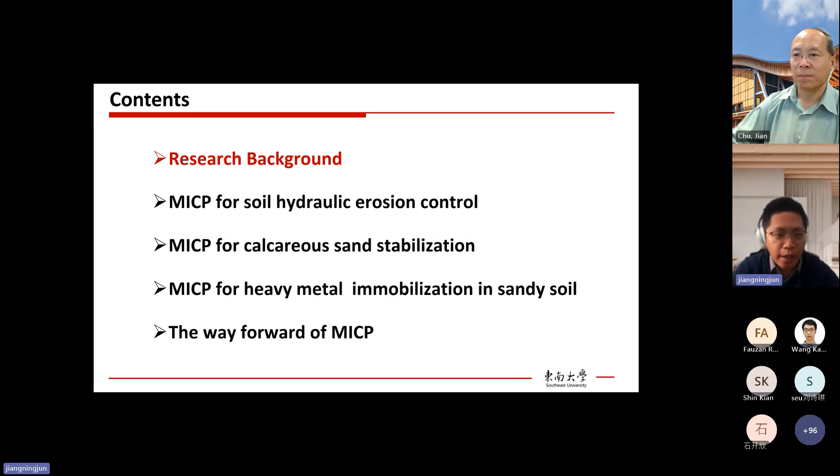For today's presentation, firstly I would like to briefly introduce the background of biosoil research. Then I will spend most of the time introducing three studies done by our research team in recent years: one for soil hydraulic erosion control, second for calcareous sand stabilization, and third for heavy metal immobilization in sandy soil. Finally, I will take a few minutes to talk about the future for MICP.

As we know, in classical soil mechanics, we normally regard soil as a three-phase substance consisting of solid, water, and air. All modern soil mechanics theories are based on this three-phase framework, meaning we only consider the inorganic matter in soil - we ignore all biological activities and substances in soil.

From the perspective of agriculture, environmental science, and engineering, this is not correct, because biological activity plays a very important role in soil. It can change soil chemical and biological properties and affect a lot of things. But in soil mechanics, we simply ignore it.

So in recent years, people gradually recognized the importance of biological things like plants and bacteria in soil that could affect the soil engineering properties. That leads to the establishment of bio-geotechnics, a very new branch of geotechnical research.

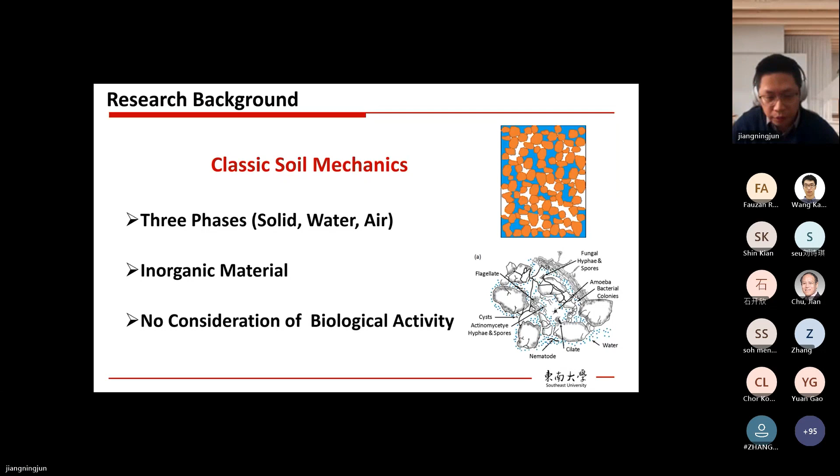Okay, so in bio-geotechnics, currently people are focusing on several processes like biomineralization, biogas, or biofilm. Then among these processes, biomineralization, or more specifically, microbial mineralization, is one of the most popular areas for research. So actually, microbial mineralization is a quite ubiquitous process in nature.

It can be driven by many processes, including oxidation reduction. For example, the reduction of sulfate is a quite common process, like photosynthesis, because plants can absorb CO2 from the air to produce carbonate, and this could lead to mineralization. And among these microbial mineralization processes, microbially induced carbonate precipitation, or MICP, is a key research area in geotechnical engineering. So here, when we talk about MICP, we normally refer to urealytic-based MICP.

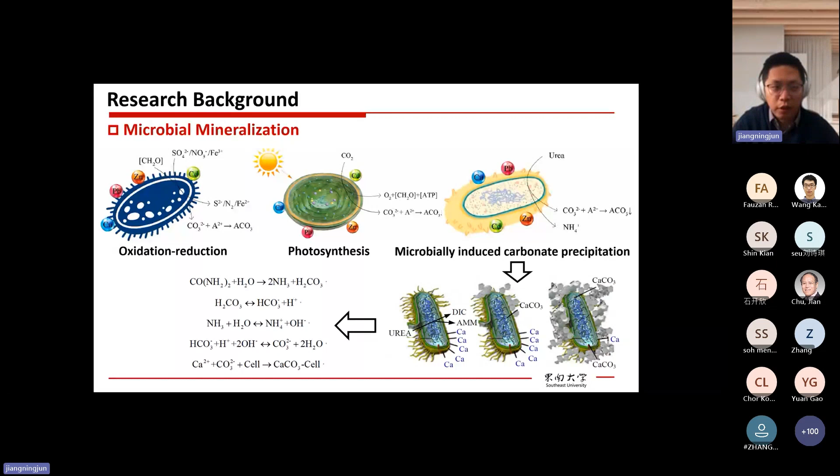Since I believe the audience today is quite familiar with MICP, I'll just briefly introduce the process. For urealytic MICP, firstly, some urease-producing bacteria, which could be standard bacteria or native bacteria, secrete urease. This is a special enzyme. This enzyme could hydrolyze urea to produce ammonium and carbonate. And meanwhile, the environment pH also increases, so it becomes alkaline.

Okay, so under this condition, if there are also calcium ions present in the system, then the calcium ions could react with carbonate ions to generate calcium carbonate. And this leads to crystallization and mineralization. So the formed crystals, if happening in sandy soil or granular materials, could cement the granular soil particles. So this could lead to the improvement in soil engineering behavior.

So previous research about MICP has revealed that the mechanisms of MICP for granular soil improvement are mainly these 3 points. First, the generated calcium carbonate crystals could provide bonding strength, so the cohesion could increase. Secondly, because we have extra crystals within the soil, the overall density of the soil is improved. Improved density normally means improved strength.

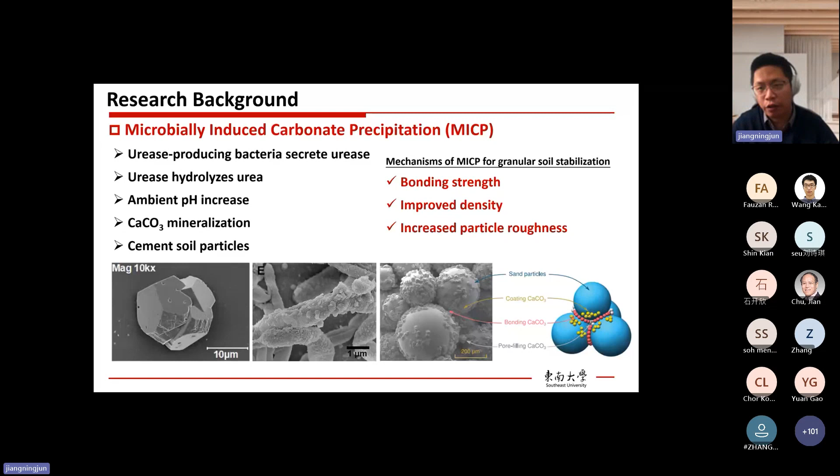Then next, I would like to talk about how we can potentially implement MICP in the field. From the perspective of environmental engineers, there are 2 ways to implement bio treatment. The first one is bio-augmentation. The second one is biostimulation. Bio-augmentation means that some standard known bacteria cultivated in the laboratory are directly injected in the form of solution into the ground, followed by cementation solution injection. And this could lead to the MICP reaction in the field.

Of course, this one is quite convenient because we simply need to prepare an existing bacterial solution and then do it. But the disadvantage is that the compatibility of the injected bacteria with the in situ soil may be a problem. They may diminish very quickly. So that's bio-augmentation. Then the second approach is biostimulation. Actually, there are also 2 ways to do biostimulation.

The first one is ex situ biostimulation. It means that the native soil is first taken back to the lab, and then extraction, isolation, and purification of native microbial species are performed so that we can get advantageous indigenous bacteria. This one could work very well in the native soil condition. Then we could perform enrichment and reinjection to get the bacterial solution back into the ground.

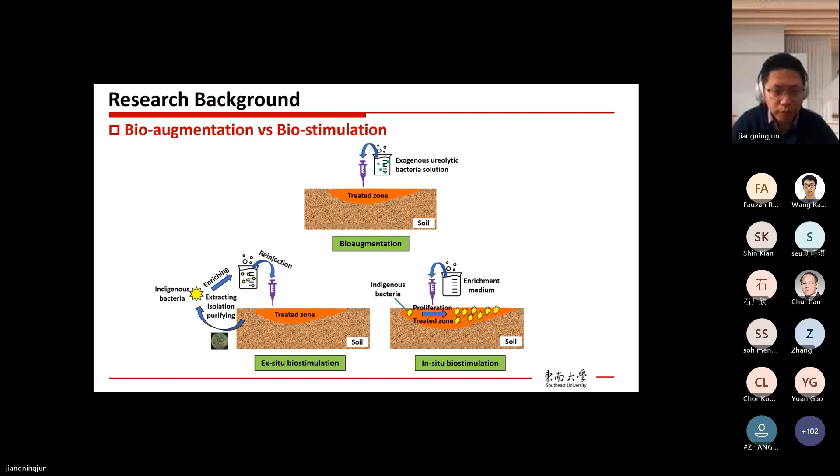And regarding previous MICP research at different scales, we can see a lot of reports and technical papers. From nano to micro scales, people have used SEM to get the microstructure features, atomic force microscopes to see the interactions between particles and bacterial cells, microfluidic chips to see how bacteria and cementation solution migrate within the porous medium, and XRD to see how crystals change with time and the ingredients. At the element scale, researchers are using various geotechnical testing methods.

For example, the triaxial shear test, unconfined compressive strength test, compression test, etc., to assess the mechanical behavior of MICP treated soil. And at pilot to field scale, we can also see a lot of reports. And this is an interesting part, so I want to introduce a little bit more.

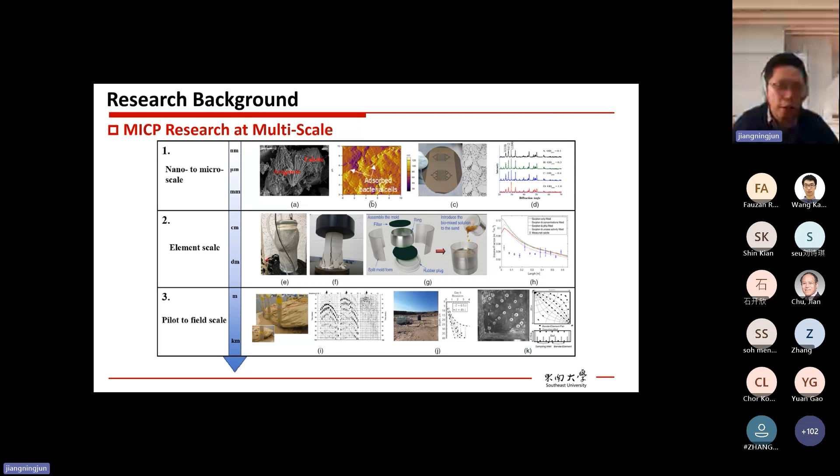So here, this slide shows some representative pilot to field scale applications of MICP in the last decade. For example, in 2013, Professor DeJong from UC Davis used MICP to do surface erosion control. Professor Chu in 2013 also used MICP to make a pond impermeable. Professor Liu from Chongqing University used MICP to treat calcareous sand in the South China Sea, and they got the solidified

sand foundations. Also in 2019, Professor van Paassen did the liquefaction control using the MICP method, and we can see the setup in the field. This year, Professor Kawasaki from Hokkaido University in Japan used the MICP method to improve the slope stability, and this graph shows the laboratory model test. And in 2021, Professor Kavazanjian from ASU treated the sandy soil with MICP, and we can see the formed column with quite high strength.

Professor Miao, also from Southeast University, considered the wind erosion in the desert area using MICP and achieved quite good results. Professor Montoya from North Carolina State University used MICP for coastal erosion control, and this is the large-scale model test. And also some other researchers use MICP for contaminant immobilization and control, and here is the setup for the monitoring. So we can see there are already many researchers trying to upscale MICP to the field.

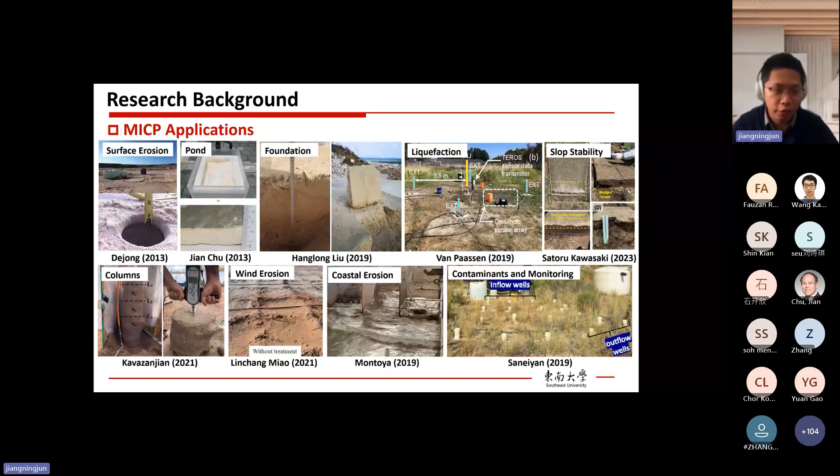So that's good. But to be honest, there are still some problems that, as bio-geotechnics community members, we have to address before it can be used in a real project. And here I listed 3 papers our team published in the last 4 years. They are mostly review papers talking about the future of MICP for soil improvement, a comprehensive review of the process, materials, calculation, and applications of biomediated soil improvement. And for the paper published in Biogeotechnics this year, we reviewed the MICP method in environmental geotechnics in particular. So if you are interested in these papers, you can simply search online and find them.

Okay, so second part, I would like to introduce our research on MICP for soil hydraulic erosion control. As we all know, the hydraulic erosion problem could lead to disastrous engineering problems like dam internal erosion, seepage piping, coastal erosion, rainfall erosion. They happen globally, almost everywhere, every year. So it's very important to find a way to address it. So here we propose the use of MICP to control hydraulic erosion.

So in order to do that, we have to bear in mind a few key points. The first one is that the hydraulic erosion vulnerability of soil fundamentally depends on soil properties, for instance, the particle size distribution, the fines content. So our target should be erosion vulnerable soil. It means that naturally the fine particles from the soil can be eroded, so that we need to do improvement.

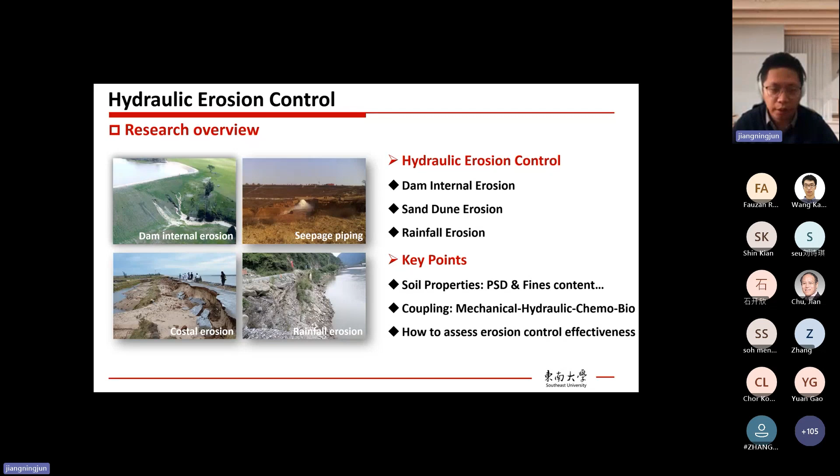Okay, firstly, this is an example we did for internal erosion control in gravel-sand mixtures. Because in gravel-sand mixtures, especially when they satisfy a certain particle size distribution, the sand particles can be very easily washed out from the gravel skeleton. So firstly, we look at this case. We designed a large one-dimensional column internal erosion testing apparatus, as you can see here. To accommodate the size of gravel particles, we made it with a diameter of 240 millimeters and height of 550 millimeters, so it's large enough to accommodate the gravel-sand mixtures.

Then we designed an MICP implementation unit, so the bacterial solution, cementation solution, and distilled water can be injected in sequence based on our need. In addition, we also installed a hydraulic pressure unit so we can achieve different hydraulic pressure levels. And this sample is controlled by a pneumatic cylinder so that we can achieve different vertical stress levels. Then in this test, we did both untreated soils as well as MICP treated soils under different hydraulic pressures. So this graph is quite obvious.

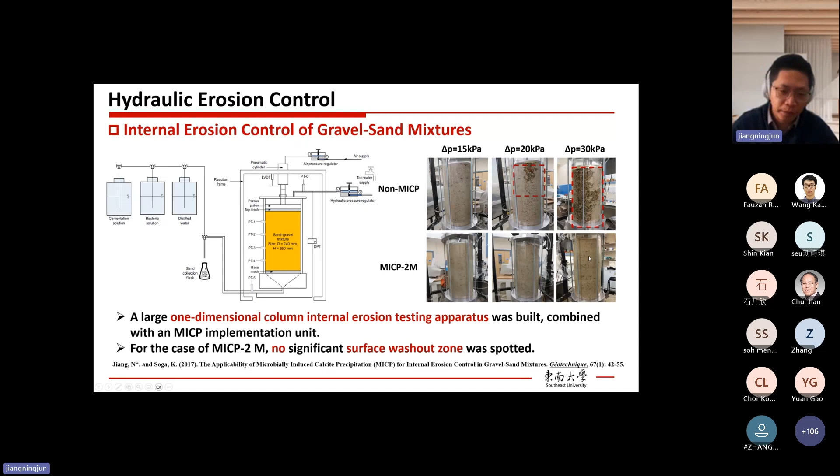Then we want to know what are the key factors that affect the erosion control effect of MICP for gravel sand mixtures. So firstly, we looked at the cementation solution concentration. And this is the erosion rate versus time graph. You can see that the black one is the untreated samples. The green one is the low cementation case. The pink one is the moderate cementation case. Then the red one is the heavy cementation case.

Obviously, if we only have a little bit of cementation, the erosion control effectiveness is not that good. In some cases, it could be even worse than the untreated case. But if we have a lot of MICP, so with more cementation solution concentration, then almost no erosion.

And in addition to the erosion rate, if we look at the erosion rate versus flow velocity relationship, we also find that with heavy cementation, the critical flow velocity is also larger than the moderate or slight cementation case. So it means that MICP treatment could improve the critical flow velocity. And the more cementation solution concentration we have, the higher critical flow velocity we have.

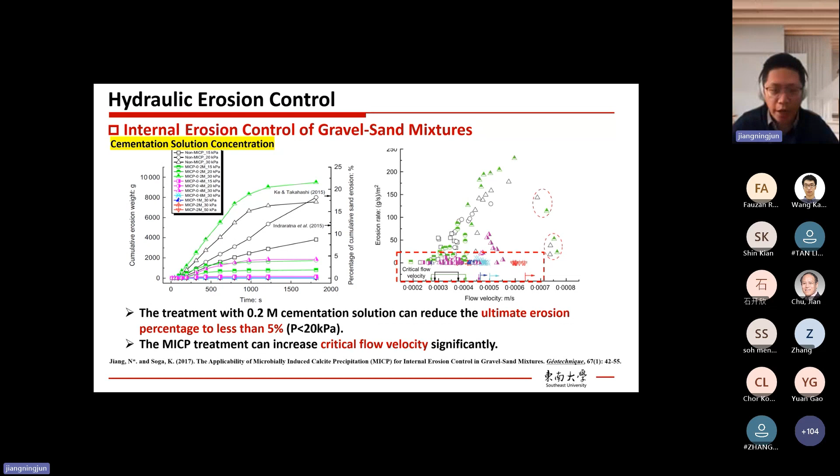In addition to the cementation solution concentration, the original soil composition is also quite a key factor. So here we investigate two cases. One is with 25% sand, the other is with 50% sand. For 25% sand, this is basically a gravel supported structure. It means the skeleton is mostly gravel and the sand particles are loosely distributed within pores. For the 50% sand content case, this is basically a sand supported structure. It means that the skeleton is formed by sand instead of gravel.

So for these two structures, after we did the erosion test, we find that MICP works very well for the gravel supported structures. It can effectively cement the sand particles so that they will not migrate through the pores. But for the sand supported structures, MICP is not always effective. In some cases, it could be worse, especially if we have a high level of vertical stress.

This is because we simply have too many sand particles. And if the cementation is not enough and we have high vertical stress, then the stress can push the uncemented sand out of the soil structure. So we see a lot of eroded mass. And if we see permeability in this case, the permeability also increases dramatically because of the loss of sand particles. So this result demonstrates the importance of original soil composition.

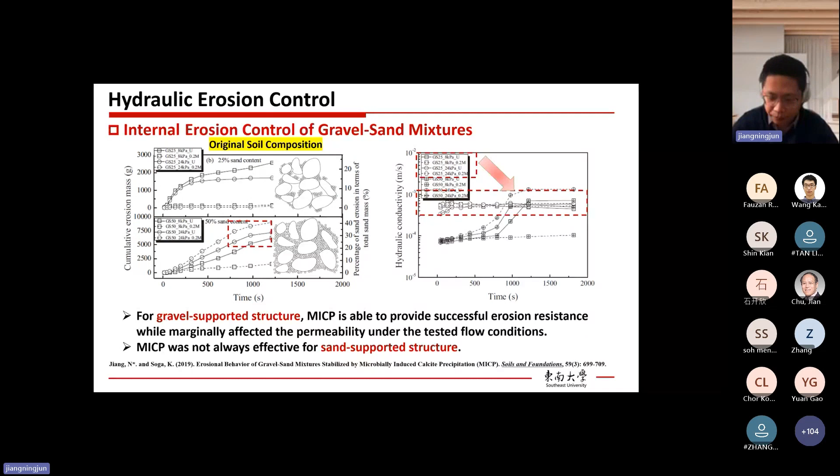So in addition to the gravel sand mixtures, we also investigated the internal erosion control of sand clay mixtures, because this also happens quite frequently in the field. Because sand and clay particles are smaller than the gravel particles, this time we made a smaller testing apparatus with 50 millimeter diameter and 100 millimeter in height.

So in this test, because we have to monitor clay, it's almost impossible to measure the eroded mass. So instead of using a balance, we use a turbidity meter to monitor the clay concentration from the outlet, so we know how many clay particles have been washed out.

And in this test, we use the peak erosion rate versus shear stress relationship to see how MICP treatment could improve the erosion control. So from this graph, we can see that the blue line represents untreated soil, and the pink one and the black one, as well as the red one, show the MICP treated case. Firstly, we can see the critical shear stress, which is the turning point between the flat part and the inclined part. The critical shear stress for the MICP treated case is obviously larger than the untreated case.

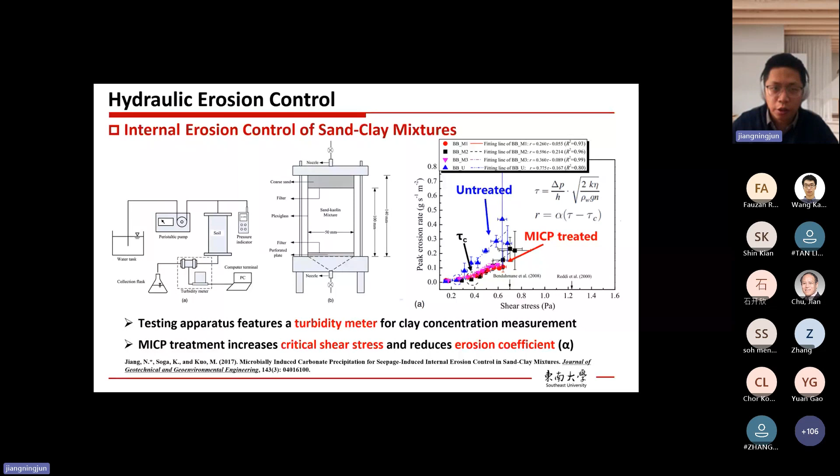In addition to internal erosion control, we also looked at sand dune erosion under different wave conditions. Here is a simple model test in the laboratory. We made sand dune models at different angles, from 22 degrees to 30 degrees, and we made waves with different magnitudes, small waves and large waves. In this test, we used the erosion volume to see how MICP could help mitigate erosion.

From the test results for both small wave and large wave cases, the MICP treatment could reduce the erosion volume compared with the red one, which is the control case, the untreated case. We also used EICP to do the treatment, and we found MICP could be even better than EICP in all cases.

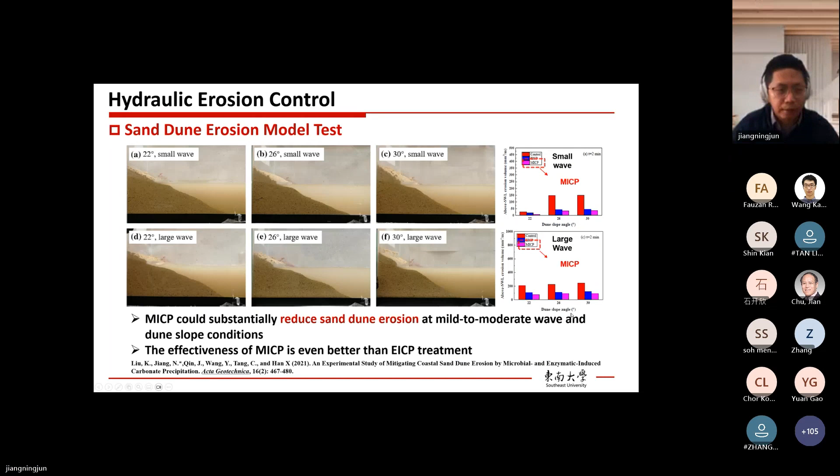Using the same apparatus, we also simulated rainfall erosion with misting nozzles on top, so we could simulate rainfall at different magnitudes. From this test, we used a photogrammetric approach, structure from motion, to quantify the erosion. From the graph on the right-hand side, the blue part shows the erosion. If the elevation change is 0, that means no erosion, and the minus means erosion.

For the untreated case, we can see a lot of erosion, mostly uniformly distributed in the center part. For the MICP treated sample, it's quite different. We almost see no erosion, only a little bit on the lower part, and we could also see some accumulation on the toe part of the slope. This research demonstrates the effectiveness of MICP in preventing surface erosion of sandy slopes under rainfall.

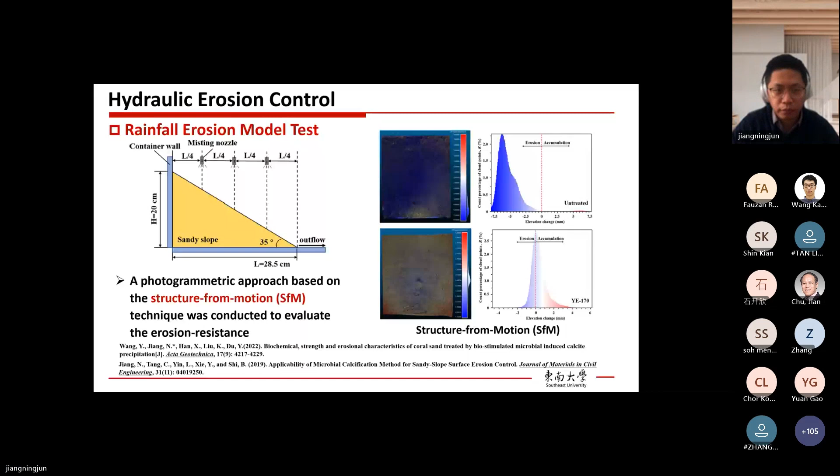Okay, so that's the first part. The second part, I'd like to introduce our research on MICP for calcareous sand stabilization. Since I worked at the University of Hawaii for several years, in the island of Hawaii, calcareous sand is a big problem because it's vulnerable to liquefaction, and in beach areas it's mostly calcareous sand. So when we want to build anything on top of it, we have to consider the mechanical properties of calcareous sand. That's why when I worked there, I tried to use MICP to treat calcareous sand.

In this research, we used the biostimulation approach because we think it's more eco-friendly. We first prepared the enrichment medium consisting of either yeast extract or nutrient broth plus urea and other materials. Then we prepared the cementation solution consisting of calcium, urea, and some trace nutrient additives.

First, there was a 48-hour enrichment through surface percolation to complete the stimulation process. Then we took some soil samples and extracted the pore solution for analysis, such as ureolytic activity, pH value, urease concentration, and genetic analysis.

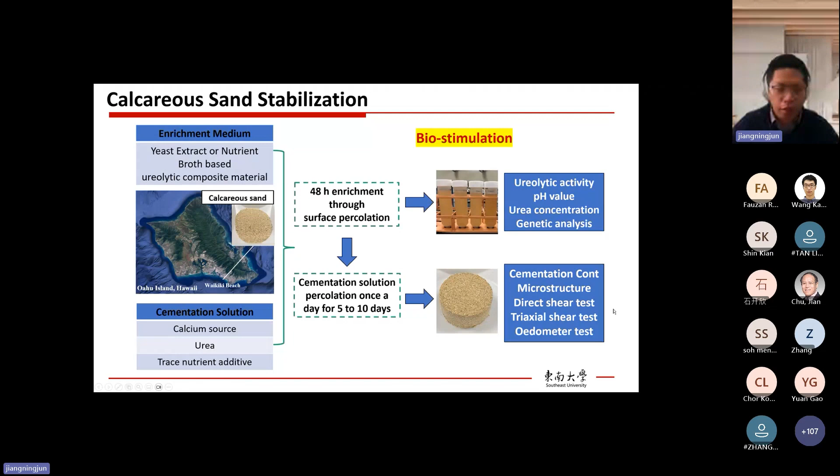For the rest of the samples, after the stimulation process, the cementation solution was applied through percolation once a day for 5 to 10 days to make solidified soil samples. Then the soil samples were subject to cementation concentration measurement, microstructure observation, direct shear test, triaxial shear test, and oedometer test to evaluate mechanical performance after MICP treatment.

First, let's see how the bacterial population changes after the stimulation process. For the first column on the left-hand side, that's the original soil without MICP treatment. We can see the existence of many different species, and we don't see a dominant species or some representative ureolytic species.

But with MICP treatment, either through yeast extract or nutrient broth, we could see a dramatic change in the microbial population distribution. In particular, we could see the proportions of ureolytic bacterial species such as Bacillus sporosarcina increase substantially, like the red one here, that's the sporosarcina. This shows that after the biostimulation treatment, we did achieve the purpose of getting more ureolytic bacteria in the soil.

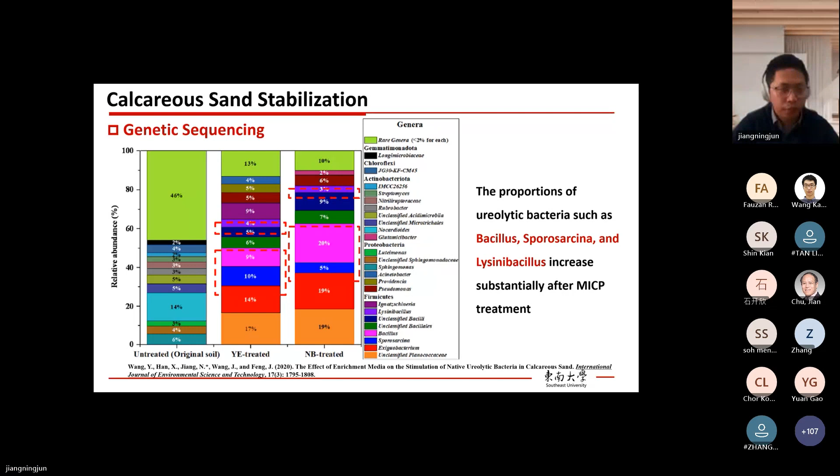After the cementation process, we used a microscope to see how cementation formed and how it distributed within the soil structure. The first graph shows untreated sand, so we cannot see any cementation between soil particles. The second graph shows the slightly cemented case, with only 1.86% cementation, where we can see a little bit of cementation between particles, but not too much.

For the next case, it's a heavily cemented case, where the cementation content is more than 6%. Here we can see quite a lot of cementing agent between the soil particles. In addition to the interparticle connections, we could also see some formed crystals coating the surface of sand particles.

Through XRD analysis, we could see that after MICP treatment, we have more calcite. For example, this peak and this peak are new peaks compared with the original soil, which demonstrates the formation of new calcite precipitation from MICP.

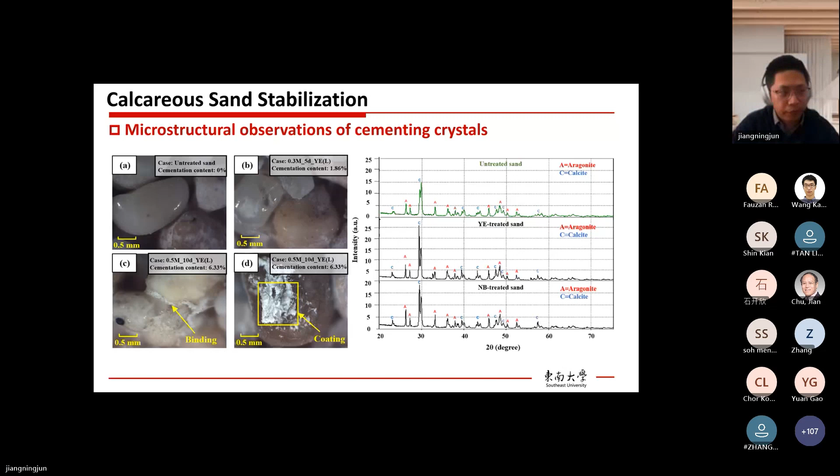Let's move to the mechanical testing part. Firstly, we performed a direct shear test and correlated the peak stress ratio with cementation content under different normal stresses. Here, the results are quite interesting.

At low normal stress conditions, the peak stress ratio increased a lot with cementation content, meaning MICP works quite well. But at high normal stress levels, like 400, 600, the peak stress ratio still increases with cementation content, but only a little bit. So at high normal stress or high confinement conditions, although MICP could still work, it could not help too much because the confinement dominates the strength of sandy soil.

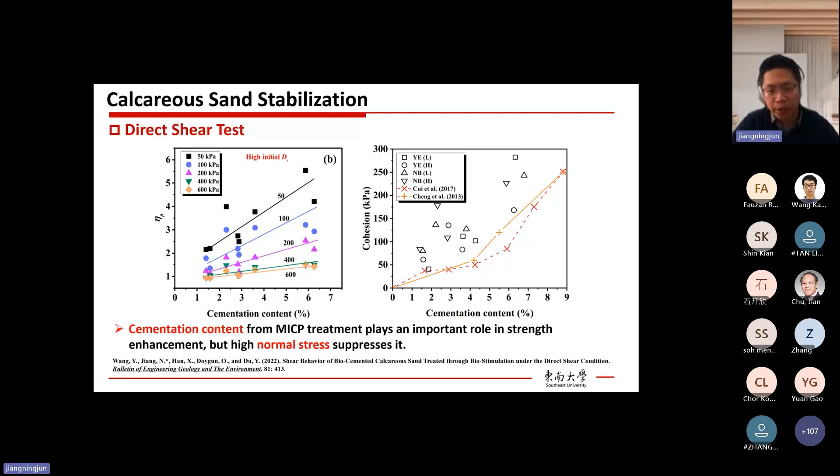From the direct shear test, we also obtained the cohesion and correlated it with cementation content, and we see an increasing trend. We compared with other published results, like from Cui and Cheng, both of whom used bio-augmentation for MICP. Compared with their research, we find the cohesion we obtained is larger than their cases. This is just a preliminary result showing that potentially biostimulation could work better than bio-augmentation.

The compressibility, from the one-dimensional compressibility test, also shows a similar trend. With increased cementation content, the compression curve shifts upward, meaning the soil's ability to resist compression has improved. We calculated the coefficient of compressibility at different stress ranges, and similar to the direct shear test results, with increasing cementation content, the coefficient of compressibility AV drops, meaning MICP helps reduce compression.

At high normal stress conditions, this improvement by MICP becomes diminishing, and I think the mechanism is similar to what I explained in the direct shear test.

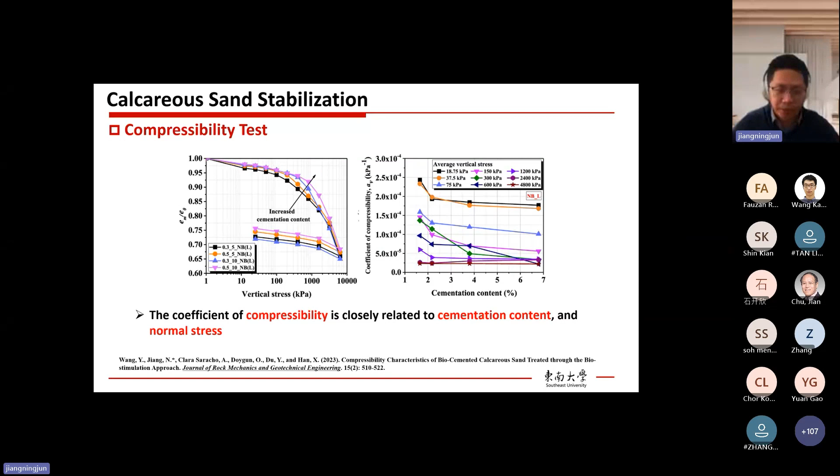To better understand the mechanical performance of MICP-treated calcareous sand, we performed both CD and CU triaxial shear tests. For the CD triaxial shear test, the first graph shows the post-failure state of the sample under low and high confining stress conditions. The second graph shows the deviator stress versus effective mean stress relationship. Because it's a CD test, they are simply straight lines.

As we can see for the bio-cemented case, the solid line compared with the dotted line—the solid line goes further right, meaning the strength of the soil has been improved.

Based on the testing results, we obtained the failure envelope both at peak state and at residual state, and from the failure envelope we could obtain the effective cohesion as well as effective friction angle. At peak state, we can see that with increasing cementation content, the cohesion increases—at 9% cementation, the cohesion could reach more than 40 kPa. The effective friction angle is largely independent of cementation level.

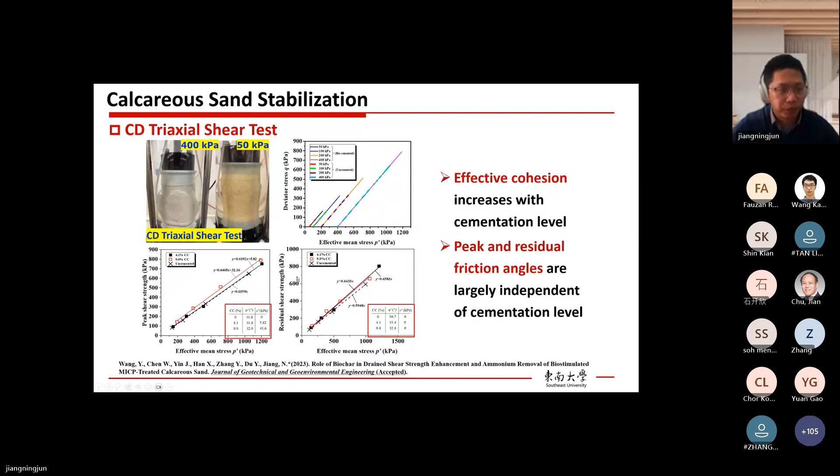For the CU test, the first graph shows the failure state of the samples at 50 and 400 kPa confining pressure levels. The second graph shows deviator stress versus effective mean stress. Because it's a CU test, we see the change in deviator stress in this way. The dotted line shows uncemented samples, and the solid line shows bio-cemented samples. Compared with uncemented samples, the lines for bio-cemented samples shift to the right, meaning it becomes more like a dense sand. By measuring the change in soil volume, we also find that the bio-cemented sample shows stronger dilatancy compared with untreated samples.

From the deviator stress versus axial strain curve, we find that it exhibits a strain hardening trend. With increased cementation level—the solid line shows 4% cementation, and the dotted line shows 9% cementation—the dotted line is definitely higher than the solid line. This means that higher cementation and confining pressure lead to increased deviator stress.

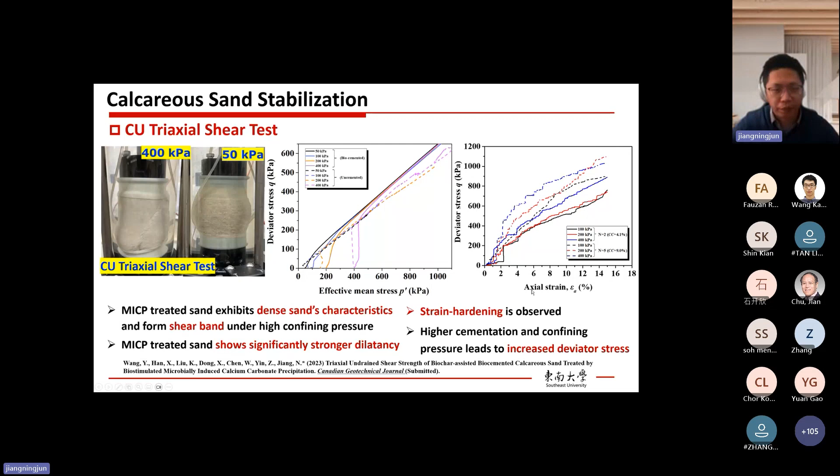So then we think about this a little more. We already know MICP could improve the mechanical performance of calcareous sand, but what can we do to further increase it, while at the same time addressing the ammonium problem, since ammonium is a byproduct of MICP. Considering this, my student proposed using biochar to do enhancement.

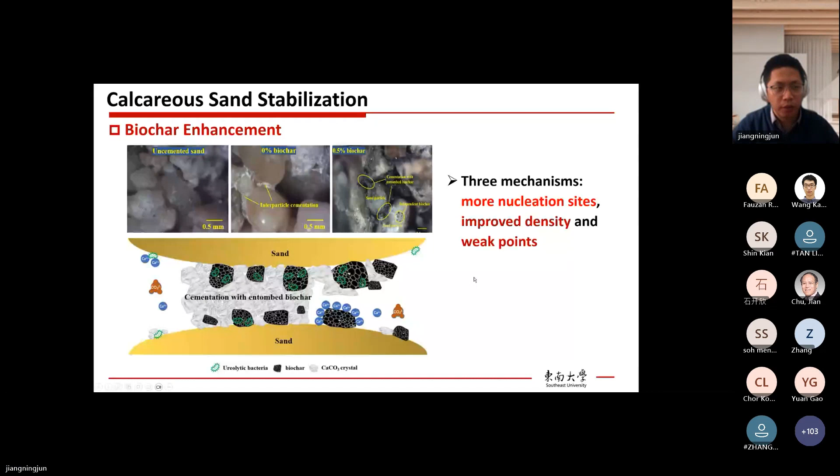We think MICP helps most at the lower effective normal stress or confining pressure range. At this range, we could see the dramatic increase in cohesion—this is the contribution from MICP. However, when the normal stress or confining pressure is high, the contribution from MICP is diminished, so it becomes aligned with the original failure envelope.

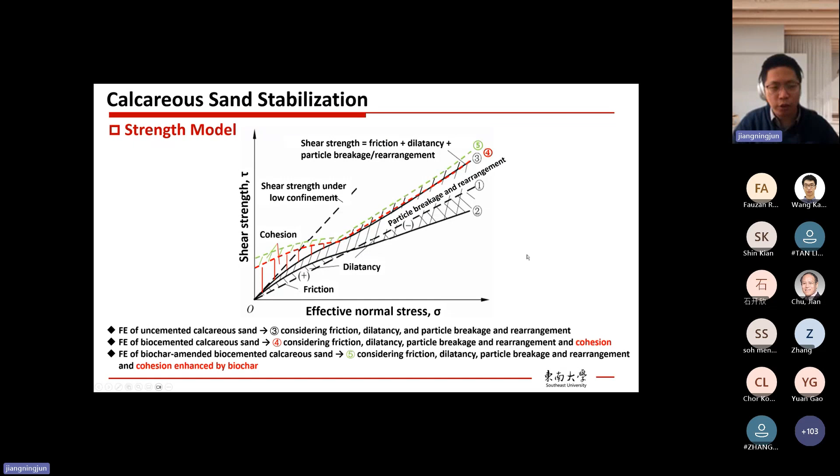So this is the strength model we proposed for both the MICP treated case as well as the biochar enhancement case.

Thirdly, I would like to introduce the third part of our research, MICP for heavy metal immobilization in sandy soil. To understand and optimize the process, we need to keep in mind that the heavy metal species, as well as their concentrations, play a very important role. MICP may only work at a certain range of heavy metal concentrations, not for all.

Secondly, it's very important to understand the bacterial activity response, including its population change and activity change. Thirdly, we need to understand the immobilization process, the crystallization process. Then, to understand the immobilization mechanism, we tested the strength and toxic leaching, the contaminant phase change, and we established an immobilization model.

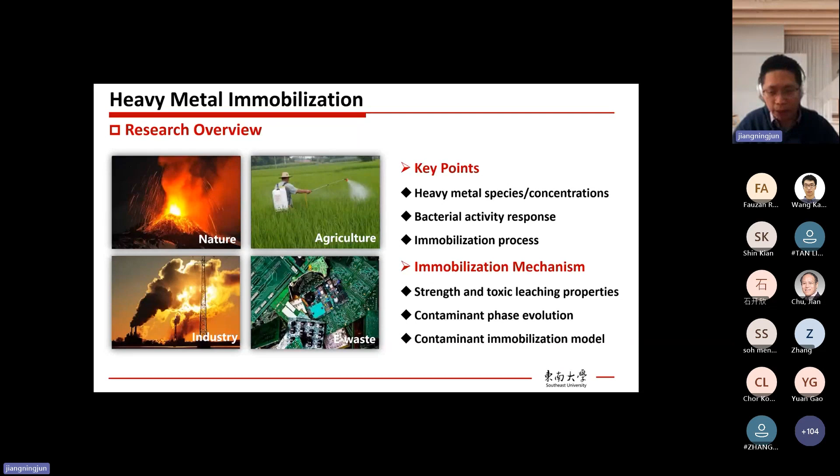So firstly, I would like to talk about how we prepare the samples. We use 90% river sand plus 10% kaolin clay to make the sample, then it is mixed with a certain amount of lead contaminants. Here we use lead as a representative heavy metal to do the research. Then when we mix it, we use enrichment and cementation solution to do the stimulation.

Here we simply use the premix method, meaning we can only do one-time treatment. After that, the sample cured for a certain period of time before being subject to strength, toxic leaching, permeability test, as well as CFU and urea concentration measurement.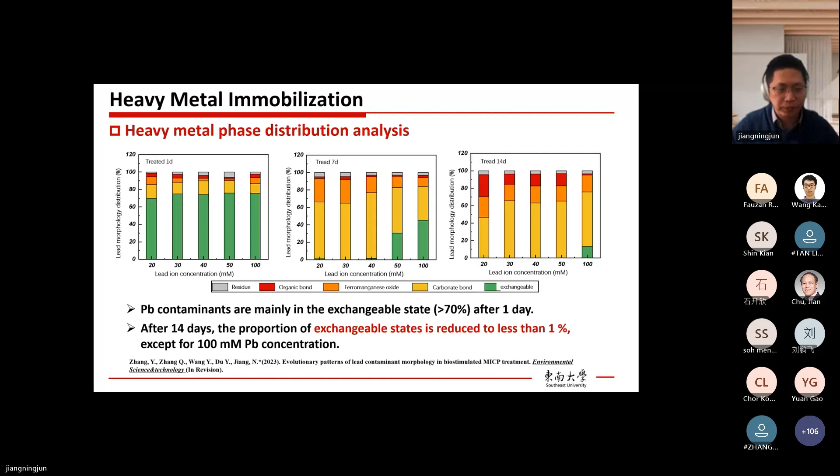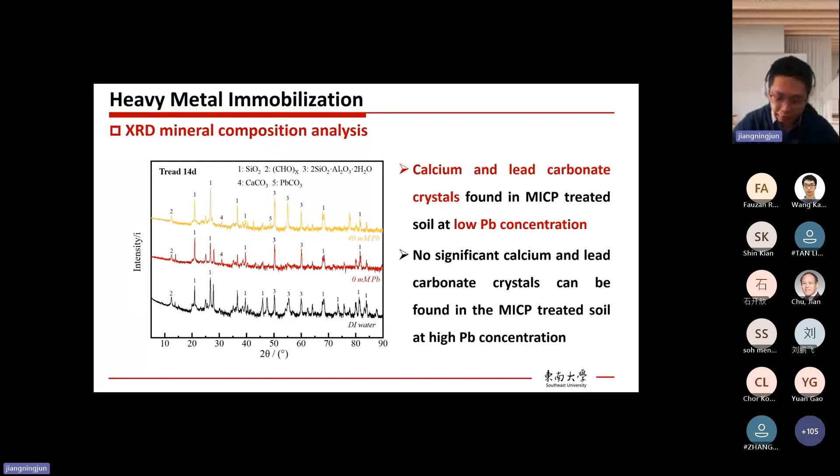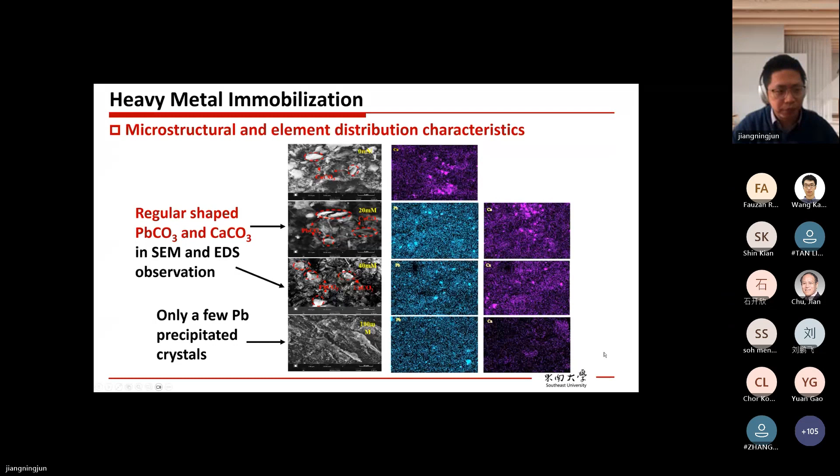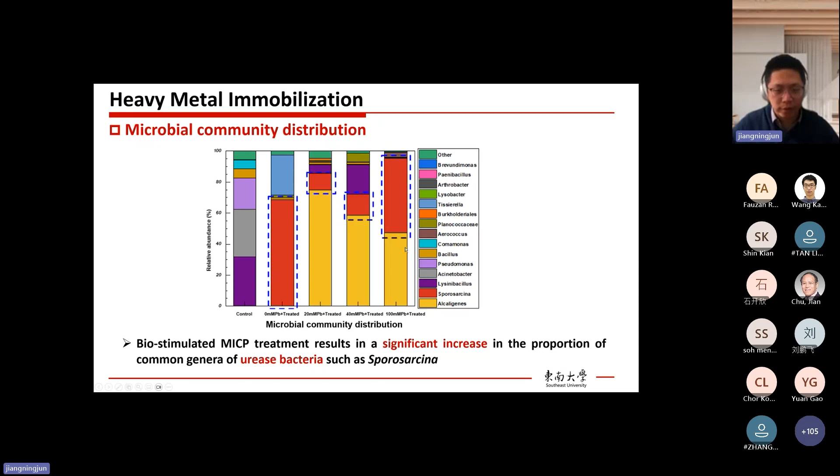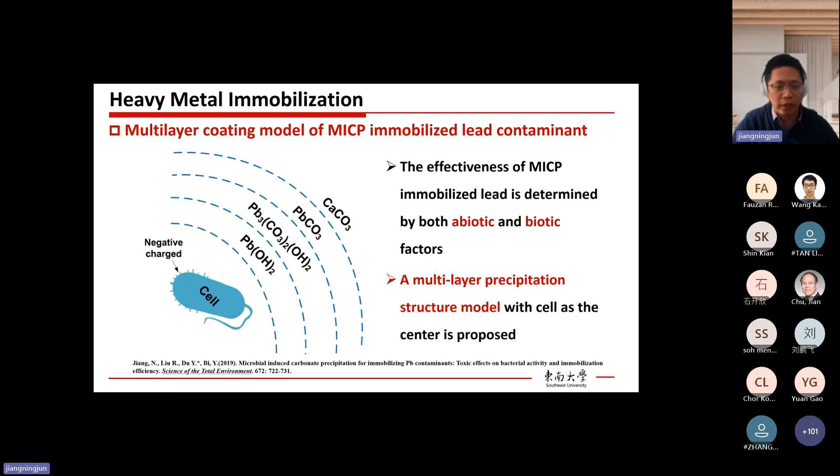So this multi-layer system has certain advantages because the outer layer of calcium carbonate could protect the lead in the inner part. For example, when it encounters an acidic agent, the calcium carbonate part will react first instead of the lead part. So the contaminant could still be immobilized within the structure. So this helps.

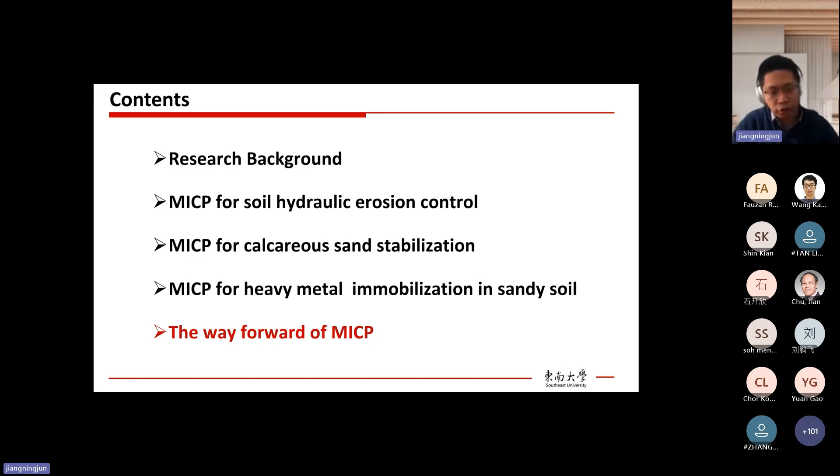Okay, so finally, I would like to spend a few more minutes to talk about the future of MICP. If we want to advance MICP in the future for large-scale field application with certain commercial value, we need to consider these three aspects. Firstly, fundamentals. We need to understand its fundamentals better. Secondly, we need to consider its multiple functionality. And thirdly, we also need to consider the sustainability of this process.

So firstly, for fundamentals, we still need to know more about the microbial processes. For example, what is the change in the bacteria from a molecular-level perspective? How about the evolution of its energy, the energy cycles during the MICP process? That's something we have not yet explored a lot. Also, for the chemical processes, how about the thermodynamics or the kinetics of the crystallization process, and how crystals evolve with time and change with environment? That's something we need to look at. And thirdly, the biochemical fluid in porous media.

How we can use advanced models to describe this reactive process. Then for multiple functionality, while most of current MICP research focuses on soil strengthening, can we also think about how to couple it with ecological, environmental, and carbon footprint benefits? For example, it can both improve soil strength as well as absorb carbon dioxide from the air, right? If it can achieve multi-functionality, then its potential use could be quite wide.

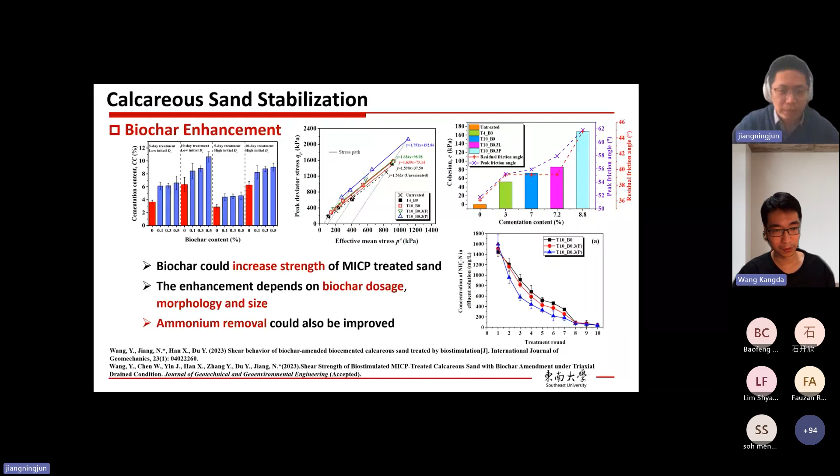Another question is regarding the heavy metal section. You mentioned the heavy metal is treated for 7 days and 14 days. Is this one treatment, or do you treat every day? This is only one treatment. Then after that, we just cure it for different periods of time.

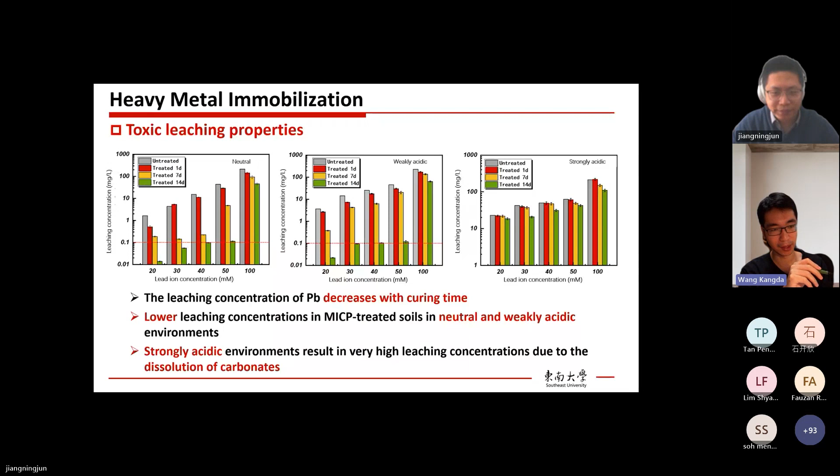Okay. So what I understand is you treat the contaminated soil for one treatment only, and you left it for 7 days and 14 days and see the absorption of the heavy metal, right? Yes, that's true. Okay. So then the question is why the heavy metal is gradually fixed by the MICP process, even though you treat it only once at the very beginning?

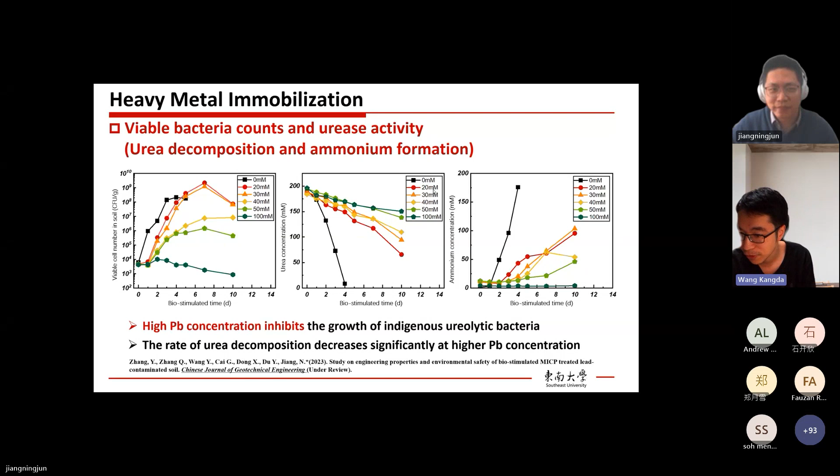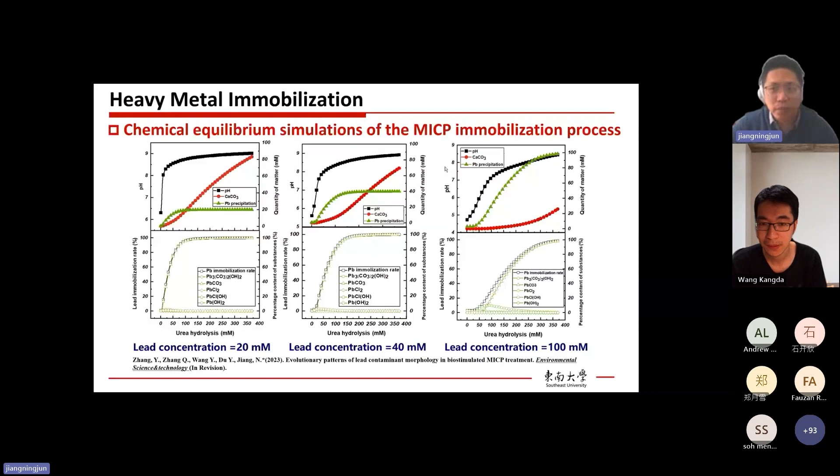So okay, I found Dr. Qianwen asked a question. He is curious using MINTEQ for the modeling because it did not have the modules. You can go to the chat box. She has two questions. The module of the how to use MINTEQ to mimic the rate of the urease. Yeah, it seems. Let me see. I cannot see the chat box. Oh, okay. Let me see. Oh, okay. I can see. Okay.

So thank you very much. For MINTEQ, because MINTEQ did not have the module for biological reactions, how did MINTEQ mimic the rate of urease? Why did you still input calcium to stabilize heavy metal? Yeah, this is also my question. Yeah. Okay, so that's a very good question. So yes, MINTEQ does not have a biological module for the reaction. So that's why we control the amount of urea that has been decomposed, and we use it to represent the reaction.

For example, if we only have like 10 millimole urea hydrolyzed, it means that only a little bit of reaction happens, right? If we have 200, 300, it means that a lot of urea has been decomposed, right? So actually the graphs I show give you the whole process, assuming we can wait a very long time so that the whole reaction could complete. But actually for the 100 millimole case, maybe only like 20, 40 millimole of urea is hydrolyzed. So we only see the first part of the graph to represent results.

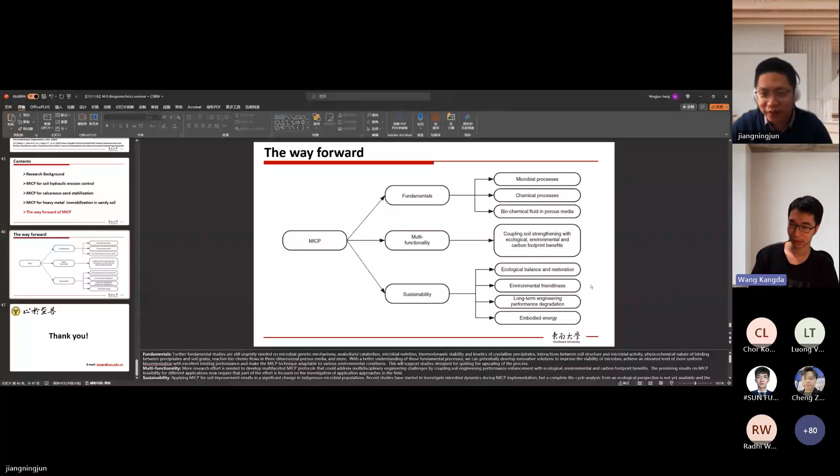He also asked about offshore foundation protection. I think what MICP can do is to protect the near sea beach - just spray it on and it can stabilize the sand. Our group has already done some research about this.

I can also add more about the benefit of doing MICP and upscaling it. From Singapore's point of view, most cement is imported from other nations like Malaysia, Indonesia, even China. So the Singapore government also thinks about producing cement themselves without importing from other nations, because it could be a national security issue in the future. So they want to explore more about using different methods to replace normal cement. Another factor is the global trend of carbon neutralization - for MICP, the carbon footprint should be lower than normal Portland cement. That's why the research is more focused on new low carbon materials.

If you have more questions about MICP, I think Prof. Jiang is a very experienced expert in this field. So if you have more questions, just drop an email to him - his email can be found on the SU website. Just browse the SU website, and if you have any more questions, send an email to him, or you can also send to me or to Prof. Chu. We are all welcome.